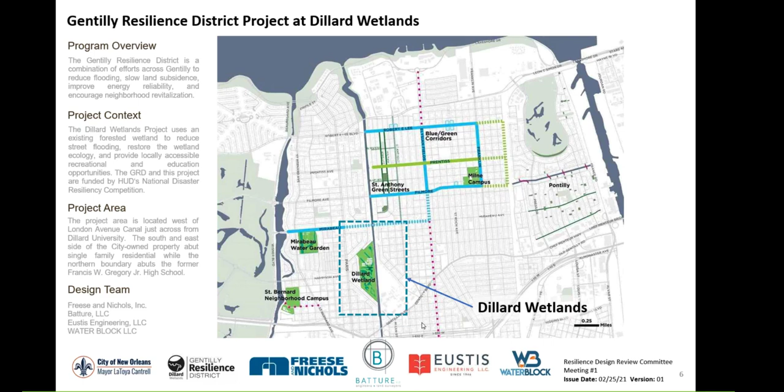And this is the project site. It's really looked like this since the 50s. It has never been developed. The adjacent school board property was developed, but then demolished after Katrina. And so now we have the opportunity to make this site a little bit more accessible. We've previously introduced pictures to show kind of what it looks like from the outside and from the inside, but really most people don't know about the site unless you live right next to it. Next slide.

We updated, by the way, the fact sheet for this project, for this meeting. So that is also available on the city's website for this resilience project, if you're interested in that. This is 27 plus acres, and it's very low-lying forested wetland. And as I mentioned, it's a very unique site. It's kind of left over from when the London Avenue Canal was built, separating parcels, and there was kind of a property switch and that made it the city's property. And which then allowed them to use the site now for this particular project. Next slide.

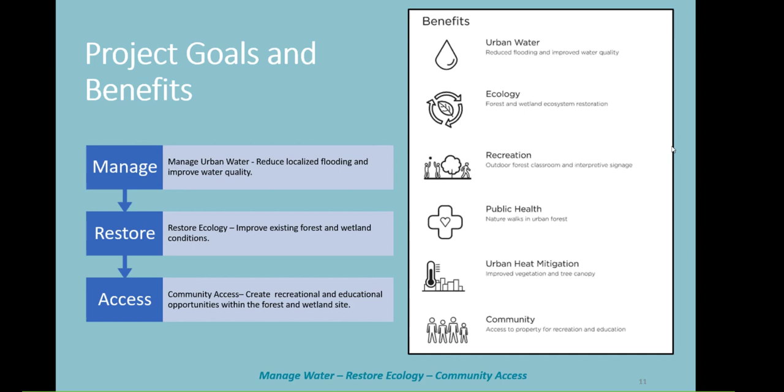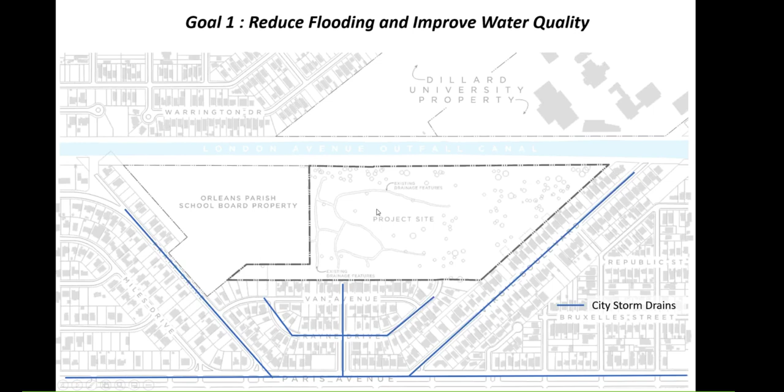So this is iterative, so you have to keep clicking a little bit. But as you can see, there's different drainage features, and in order to use the site to reduce flooding, we would need to lift some of the water, take it out of the city storm drains and system, bring it into the site, and allow it to flow in the site, and that will not only reduce some flooding, but also improve water quality, so it can be filtered,

allow for as much infiltration as possible and allow the overflow to go back into the drainage system and then be pumped out. So that's one of the critical elements. So there will be a small lift station to lift the water into the site from the storm drain.

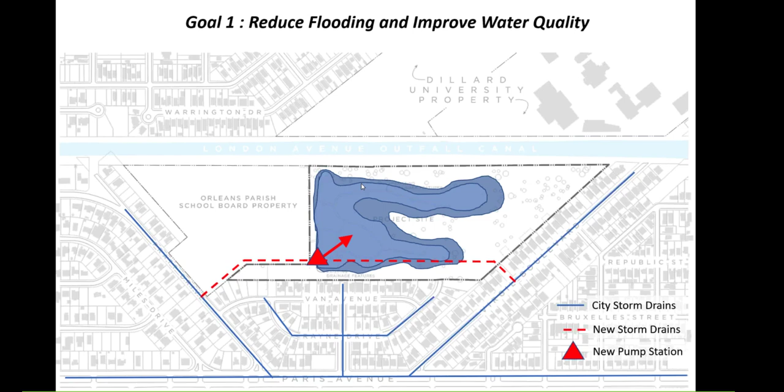Next slide. As I mentioned, we did a very intensive vegetation survey to really identify the main local species that are already very large and mature that we want to protect, and some of the different areas where we have Chinese tallow, which is an invasive that you want to reduce and manage and remove.

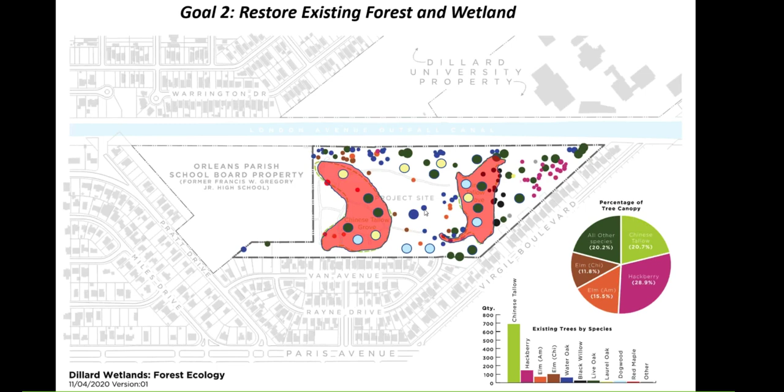And then, if you click one more time, Mary, bring in some of the more native species into those spots as we're developing the site. So removing those and replacing them with more natural species. So that's goal number 2. And then we come to the next goal. Next slide, please.

Really providing different points of access, and the site is really well located for that. You can access from Paris Avenue, from Mirabeau. Mirabeau actually has a dual bike lane, separate bike lanes on each side of the street. From there, you can access this. There's a lot of residents around there that could walk to the site.

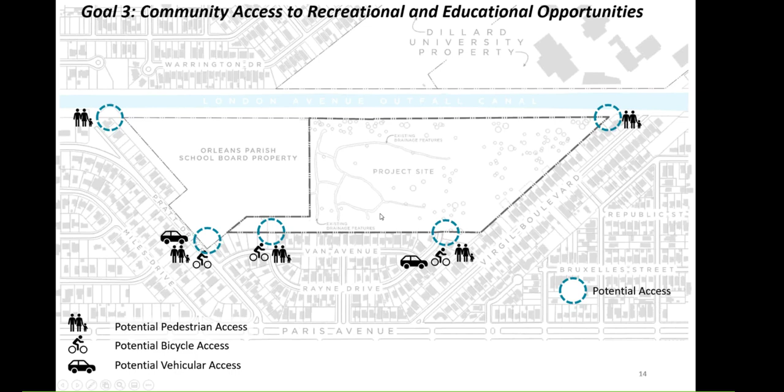So you've got to think through how you can make access safe, and also how you can make it not overwhelming for the neighborhood. Next slide. With that, I hand it over to Atiana with Waterblock to talk a little bit about what we've done to get feedback from the community and what we've heard so far.

Atiana? Yes, thank you, Nina. Hi, everyone, and good afternoon. As Nina mentioned, my name is Atiana Cordova, and I'm the founder of Waterblock, and we've been leading the outreach efforts for the project. Next slide, please.

So with a few slides that we're going to present today on the outreach, we're just going to give a brief overview of what we've done to date. Through our work, we started off with some stakeholder meetings. We thought that it was very important to connect with the existing partners within the neighborhood and those that would be impacted by the project. So we held a meeting with the Flood Protection Authority in early October.

Then we also held a meeting with the Orleans Parish School Board in late October and with Dillard University in November. With the Orleans Parish School Board, with their property being adjacent to the site, we thought it was important to build upon this relationship. One, to understand what their goals are with their site specifically, but also how we can partner going forward with the project. This was the intention with the 2 other meetings as well.

After those stakeholder meetings, we also held a neighborhood canvassing event. And the point of this canvassing event was to talk with the residents and neighbors themselves that would be directly impacted by the project. So we started off by doing some surveys and door-to-door interviews in November. So just talking with residents about, one, if they knew about the project, and if so, what did they know, and understanding what their desires were for the site and what challenges or concerns they had as well.

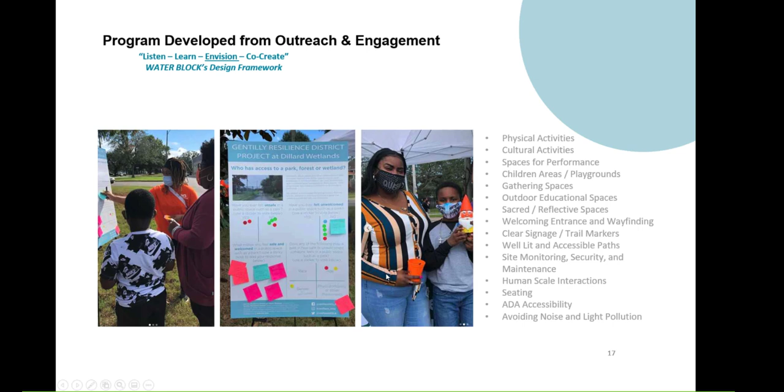I'm basically going to cover more in depth what Nina presented and the three goals of our project, which are managing urban water, restoring the ecology of the wetland area, and providing community access, along with all the other things that go along with that. So next slide, Mary.

So first I want to cover the managing urban water aspect of the project. It is one of the key requirements of the grant funding source. So this is what we focused on a good bit in the work that we have done thus far.

Our first step in that is looking at the city's drainage system and determining how we can reduce flooding by essentially storing or infiltrating more water into the project site. And we've utilized the city's existing PC SWMM model to model the hydraulics and the hydrology of the area.

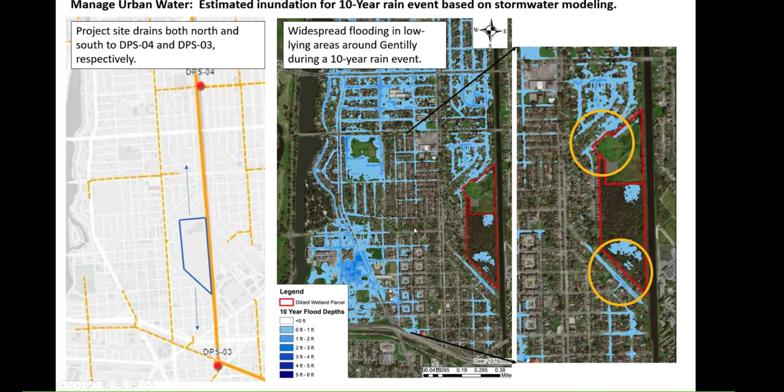Anita talked a little bit about how we're planning on accomplishing that. Basically, we're going to tap into the city's existing drainage system along Pratt Drive and along Virgil Boulevard with some storm drains. We've coordinated a little bit with Sewerage and Water Board as far as how to do that and standards we would have to meet in order to accomplish that.

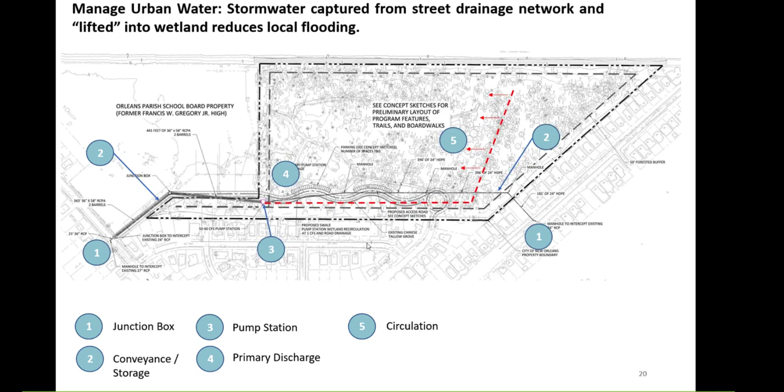And it looks like spell check got us with the number of million gallons, but the property can store, we've estimated, from its current water surface elevation up to what we would lift it to, around 15 million gallons of additional runoff that we could capture there. So that's a pretty significant amount.

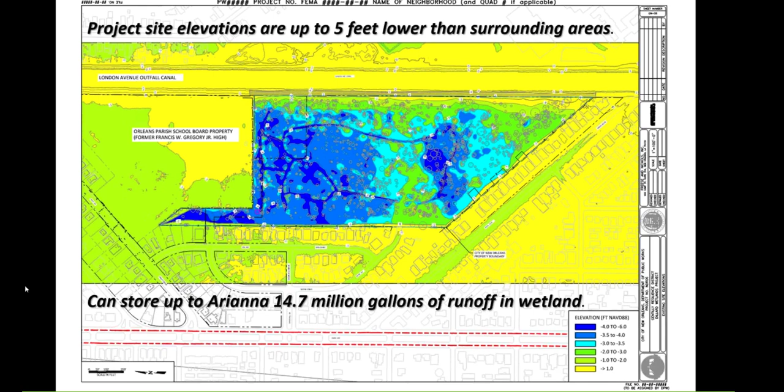Now there wasn't, as you saw, a significant amount of street flooding, but this provides more storage for adjacent areas and has benefits beyond just the project site itself. So that's what we're showing here with this slide. Okay, next slide.

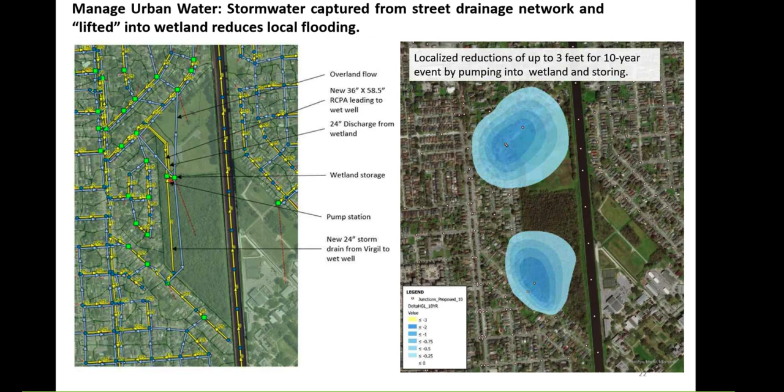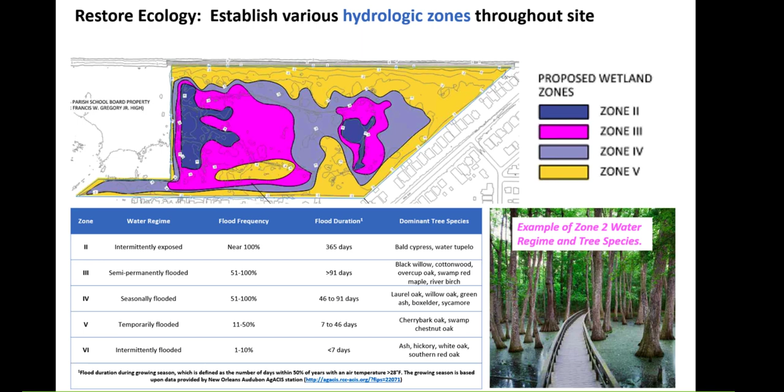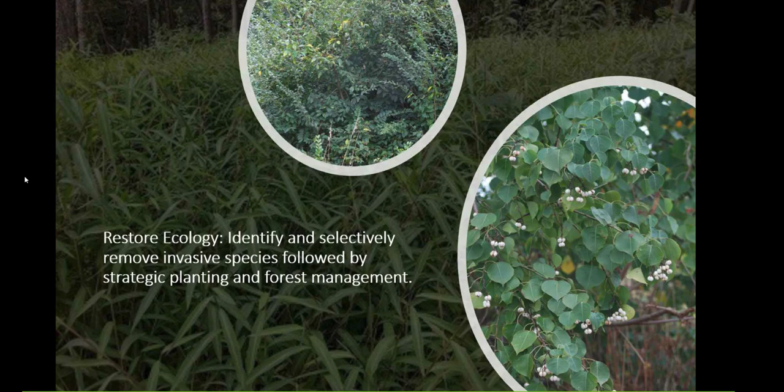I mean, it is an ongoing process. One of the things that we do to limit those invasives from returning, and you can click on the next slide, Mary. Next slide, Mary. Is to establish a robust planting plan. To go back in when we remove the invasives with a robust planting plan.

That would include everything from trees that would ultimately create canopy, understory trees like a Virginia willow or buttonbush, to shrubs, and then even understory vegetation like ferns and flowering plants like the Louisiana swamp iris. Those would be accomplishing both biodiversity as well as creating interest for the community that visits the site. Next slide.

And then I think, from the standpoint of what you all have been waiting for, when you start to look at drawings and begin to see what this looks like on paper, what we have here is a series of 5 different exhibits, and they essentially reflect an iteration that the design team has gone through. None of these are necessarily set in stone at this stage, and our process going forward is to engage with the community, start to solicit feedback on these more geometrical considerations.

But as we flip through these slides, what you'll see are some common things. Number one is an access road that would bring people to the site, provide school children, educational groups with buses, people with disabilities that need closer proximity to the site so they can enjoy the network of trails and spaces that the programming will develop.

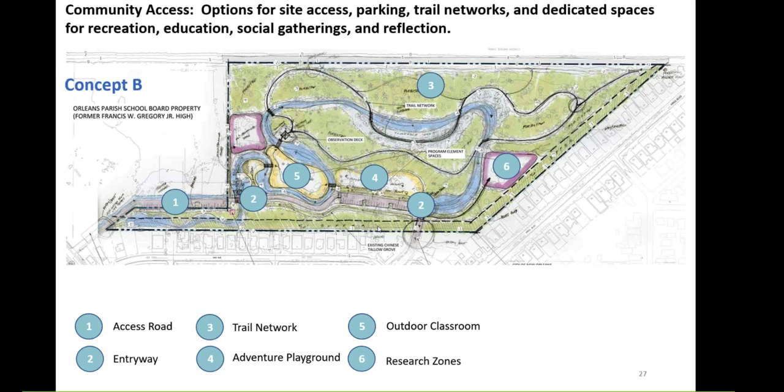The next slide, Mary. I won't dwell on these too much, other than to just show you, and I think these are included in the drawing set that you all have received, and hopefully you've had a chance to review. But again, you can just see some iterations of access road, what that might look like, the number of parking spaces. None of those details are set in stone, and we're working on developing those and furthering those as we proceed with the design. Next slide.

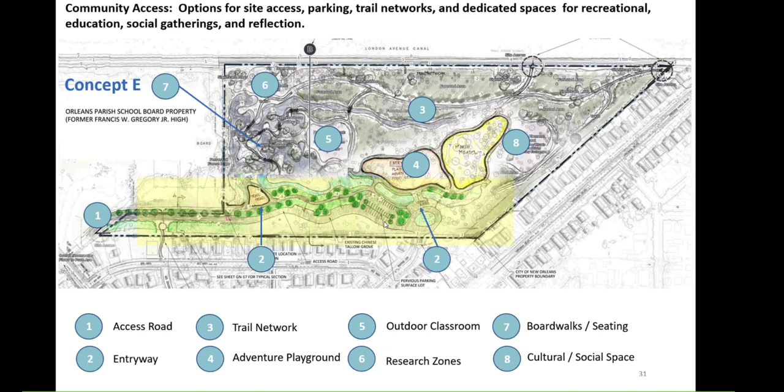And I think I'll just turn it over to Nina to wrap us up here. I think we're pretty much at the end of our presentation for this evening. But Nina, take it. Yeah.

So as you know, this meeting kind of is the end of the concept design phase. We then move into preliminary design phase, leaving a little bit of time there to really have some meaningful stakeholder events that we can get a lot of input on these different types of features that we want to lay out throughout the site, and to really get the feedback of what people like and what people want to see.

So we really want to make sure we get plenty of feedback on this concept, so we can really have a sound preliminary design by July, and then moving into final design at the end of the year, and then construction the following. So that's kind of the general schedule. With that, I turn it back over to Sarah or Mary.

Thank you, Nina. So we will open the floor to comments from committee members. I'll just take them in alphabetical order. Austin, any comments or questions? Yeah, thanks, Mary. I was hoping you would call on me.

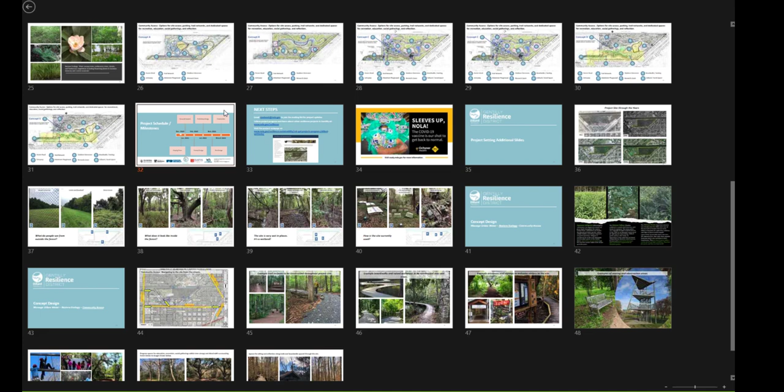Hey, so I've sent in my comments from doing the design review, but just a couple of things that I did want to bring up for this purpose. In terms of the design, can you go back a page or to concept C? I guess it's more than one page. Was it one of the concepts, Danny? A through E? C. It's probably 1, 2, 3.

Yeah, that's good. So, looking at that, I know one of the discussions has been about artwork and really bringing in that aspect. But what I don't see is maybe a trail loop along the levee itself, which would provide opportunity for education and experience along the toe of the levee. I know it would be difficult to put a path on the levee itself, but at least there would be a way to bring that into the whole education process of what the levee does and what it's for. And it would help create a looped experience instead of having a dead end there at the levee.

And a similar comment. This is why I wanted you to pull this one up. I like the idea of having the vehicular access being looped because it allows for bus drop-off much easier than having a turnaround in there. Takes up less room. But I am worried a little bit about so much parking being there. I know this isn't the final numbers, but I really would like for you all to make sure you look at what is your expected capacity in terms of the number of people who will be visiting the site by car versus the people who will be walking to the site or coming by bicycle or on their own two feet.

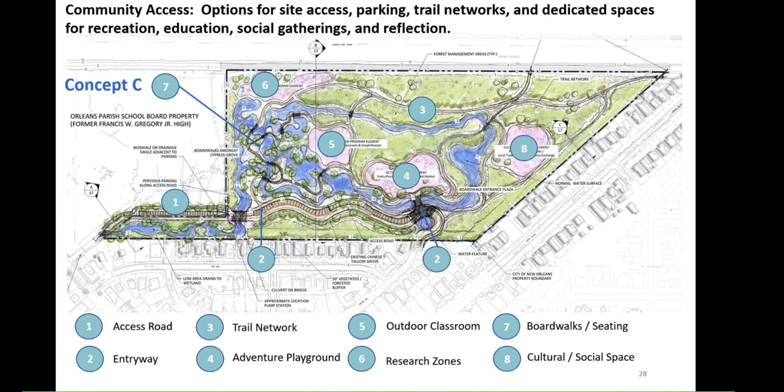And then I sent Rodrika an email just now. I hadn't zoomed in on some of the site designation images, and I didn't realize that y'all didn't have Parkways' property properly identified. Parkways has about 50% of the exposure across the canal from this property. And the pedestrian bridge access from Warrington Drive along Stephen Girard actually came through the Parkways property. A portion of that sidewalk is still there. Some of that infrastructure is still there.

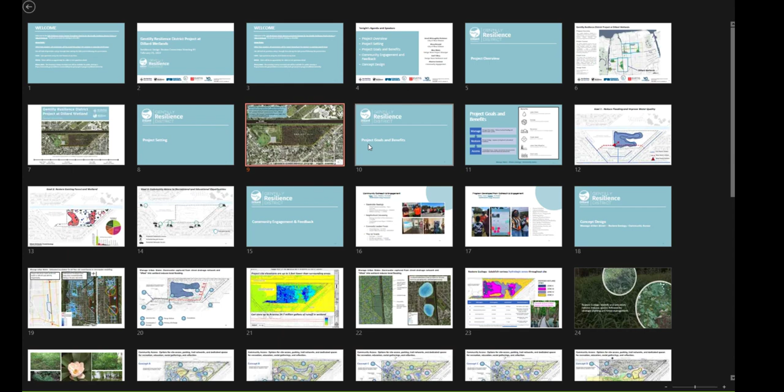So that pedestrian bridge, if you look over the first N in London, that bridge on that image, yeah, that's where the pedestrian bridge came across. That sidewalk may even still be there. It's just currently covered up by vegetation.

So, yeah, I think there's a real opportunity to bring, I guess that's the east side of the canal, and have the neighborhoods on the east side have pretty easy access. And that all depends on whether or not Sewage and Water Board will allow a flat bridge across, you know, and creating that pedestrian access and possibly bike access.

I think that's a real opportunity, whether it's done as part of this project. I think it needs to be identified, if it's not part of this project, as a future phase of this project that could really tie in, maybe when the school board property is brought in. So looking at doing some future planning, not only what's on the project site now, but also what could it be in terms of connections and expansion possibilities.

And then I think the other comments that I had for the plan were, let me back up. There's some typographical things that need to be fixed just for clarity purposes, and that's the bulk of my comments that you have in the middle.